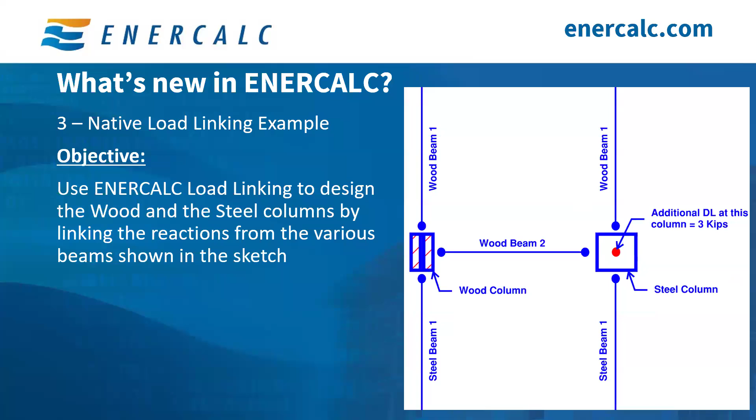Last month's session was held on May 14th, and it's titled Pole Footing Embedded in Soil. That was the module that we discussed last time. But if you jump to minute 13:35, you will be able to find this example, and we go through great detail step by step of how to use ENERCALC's native load linking feature to do all of this work seamlessly.

Overall, load linking is a powerful tool that allows the engineers to create a well-connected chain of calculations while minimizing the risk of transcription errors.

If you'd like more information about load linking, and if the video or the example that we did last month wasn't enough, please check out the load linking playlist that we have here on YouTube. This playlist will walk you through how to use load linking, again, step by step, but it will go through so much more detail, because the example discusses how to link a beam to a column and all of that.

But what the playlist does, it actually goes through every option that's available at the user's disposal to figure out how to use load linking and how to implement that into the various scenarios that engineers face every day. So you should start leveraging this powerful tool as soon as you can.

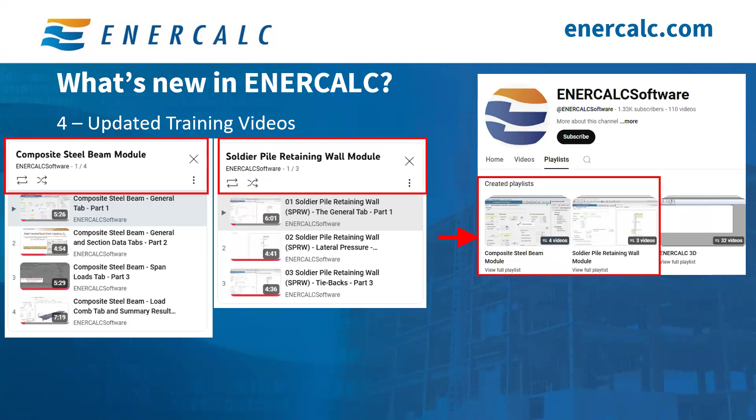Another update we have here, and this is starting in March of this year, the IBC 2024 is supported as a governing code option within ENERCALC. We will continue supporting previous IBC codes all the way to 2015. And this hopefully gives our users as much flexibility as possible to be in compliance with their local jurisdictions. As we know, many jurisdictions haven't caught up to the newer editions of the IBC.

So to update your project to use IBC 2024, all you have to do is go to General, then go to Building Code Information, and then from the Project Manager, select IBC 2024, and you can click Save and Close. Or instead of going about it the roundabout way, you can just look at the very top ribbon that you have in ENERCALC, click on this button right here that says Building Code and Load Combinations.

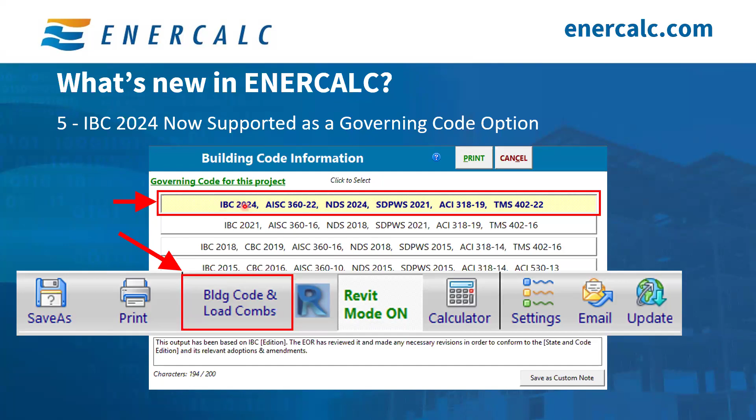Once you click on that, that will bring you to this project manager page right here, and you can just click IBC 2024 or whatever you want, and then you click Save and Close. Now, if you want to change ENERCALC to use IBC 2024, or honestly any IBC, to be used for all of your future projects as a default code, so that's the starting code that it uses unless otherwise manually changed.

If that's what you want to do, then all you have to do is go to the top left corner of ENERCALC, click on Settings, and from the drop-down menu, click on Default Governing Code and ASCE 7 Edition. Once you click on this, a pop-up window will appear, and this will allow you to do two things: choose the IBC that you want to use for all of your new projects, and that pretty much becomes your default selection.

So we choose IBC 2024, and then you have the ability to choose a default ASCE 7 edition, 7-10, 7-16 or 7-22 or whatever you would like. So once you make the selection that you want to use for all of your future projects, then you click on Select, and that will save and close, and all of your future projects moving forward will use those default values.

Another item I want to highlight is ENERCALC for Revit. ENERCALC for Revit is a Revit plugin that allows you to design structural members fully within Revit without having to export information to another calculation software. It is a simple point-and-click workflow that allows you to design a member in a fraction of the time that it would take you to do this process otherwise.

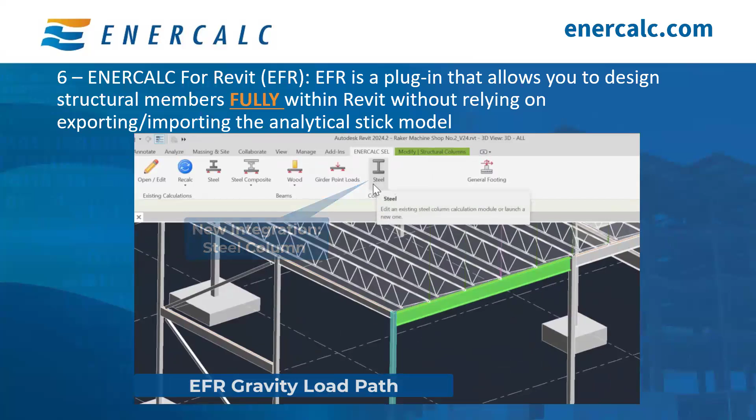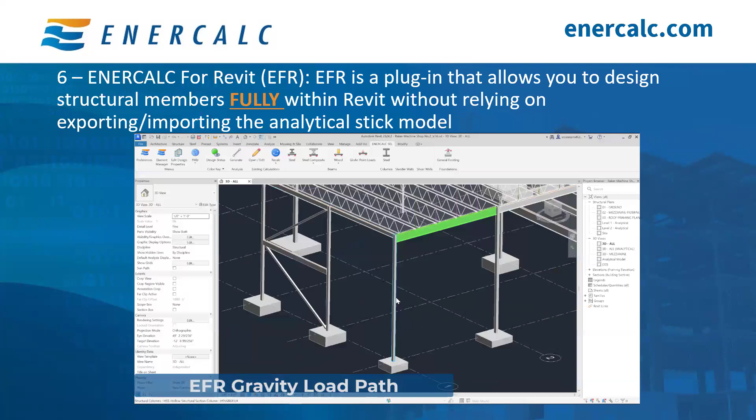Because all you have to do is just click on the member from within Revit, and it will automatically grab a lot of the information that you otherwise would have to input manually. Information such as the tributary width, the length of the member, the actual size, if you have any loads assigned to it. For columns, for example, you can assign a K factor for it. You can assign the end fixity conditions. It will know how to grab the load from a beam and link it directly into your column.

So it does plenty of the work that typically is done manually, and it takes all of that guesswork out of it. And of course, there are guided prompts that you can walk through and pick the different values that you need.

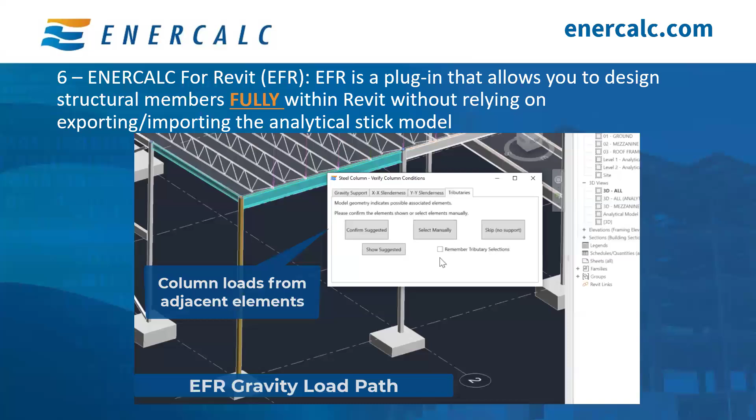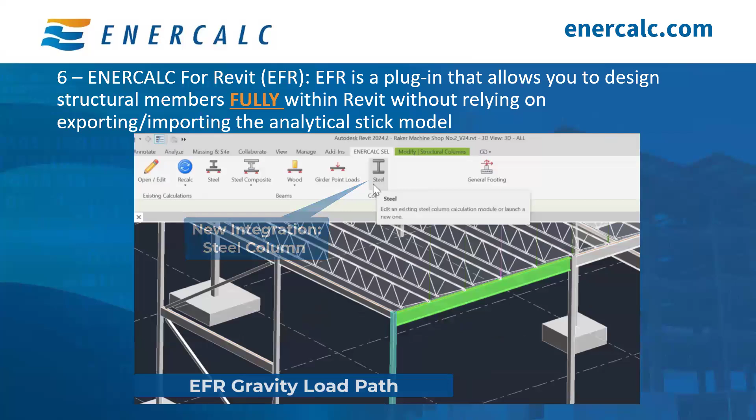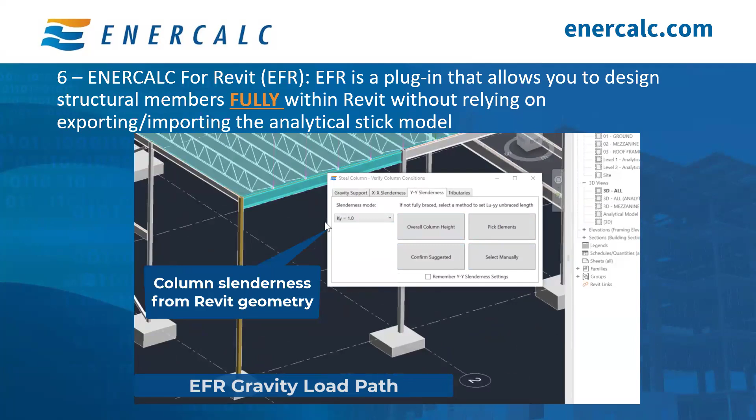So again, the process is quite simple, straightforward, and it's really that easy. So currently, EFR supports the design of steel beams and steel composite beams, wood beams, steel columns, and of course foundations. So all of our users have a full gravity load path that they can use for their projects. And of course, much more development is already underway.

So while on the topic of ENERCALC for Revit, it's worth noting that Autodesk already released Revit 2026 back in April. And I want to make sure that everybody understands that we here at ENERCALC do our best to stay active and up to date with the Revit editions. We know our users rely on our software for their daily engineering calculations, so ENERCALC is never the bottleneck of their production. Hence, we issue these monthly updates, but more importantly, from the ENERCALC for Revit perspective, we are compatible with the latest and greatest version of Revit, which is Revit 2026.

Another update is the ability to export tabular detailed results from ENERCALC to a CSV file. This is very useful to many engineers, especially the engineers who'd like to post-process some of the results outside of ENERCALC, maybe in their own spreadsheet or their own in-house tool. So all you need to do is go to the results that you are interested in. For example, we want the detailed results, ASD shear moments, and all of these intermediate values.

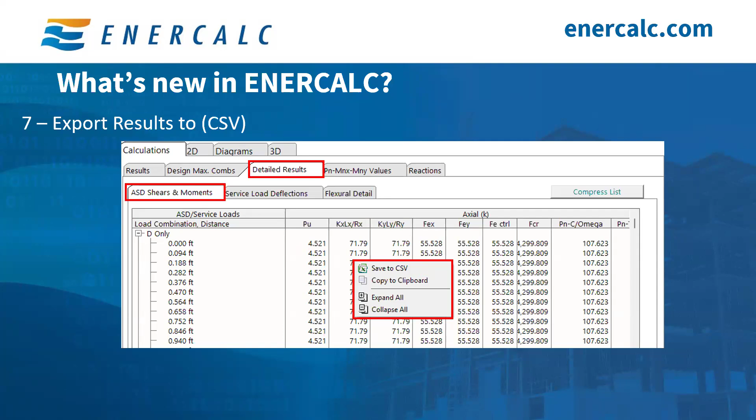And by popular demand, we made an important update this month to the general footing module. Our users now have the option to specify top reinforcement in the footing for those cases where the footing experiences tension at the top rather than the typical case of tension being at the bottom of the footing. So you can specify the rebar size and quantity for the top layer, and you can do it separately for each direction. So now our users can specify the bottom layer in both directions, the Z and the X, and then the same thing for the top layer, controlling the X direction separately from the Z direction for maximum flexibility and maximum control.

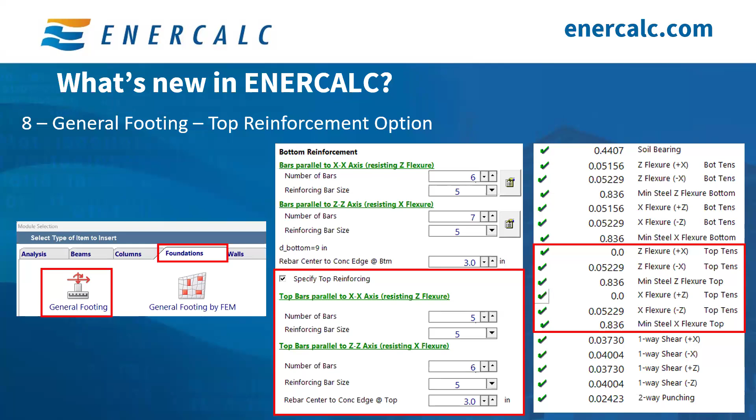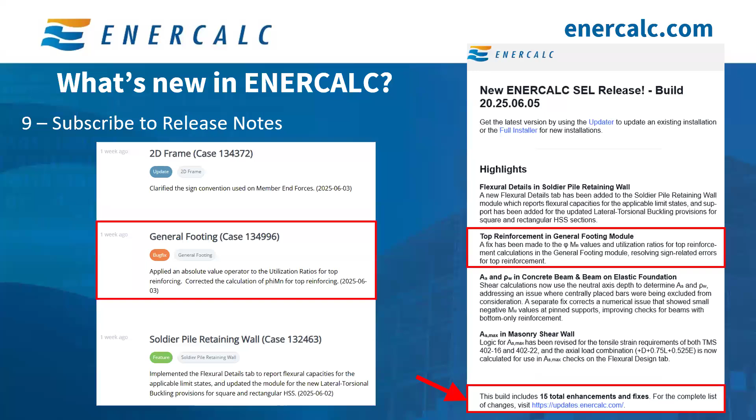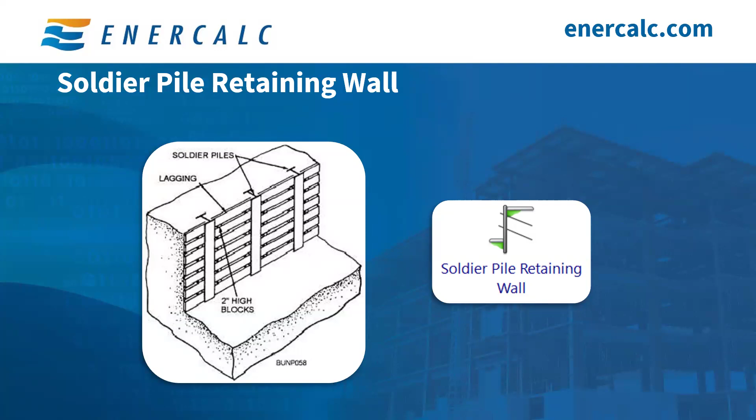Moving on, the focus of our session today is the design of the soldier pile retaining wall module using ENERCALC. There's a quick overview here of the capabilities and features of the soldier pile retaining wall module. You can perform analysis and design to check the embedment, strength and deflection of steel piles using various AISC sections. It allows the design with or without tiebacks. You can have up to 3 tiebacks.

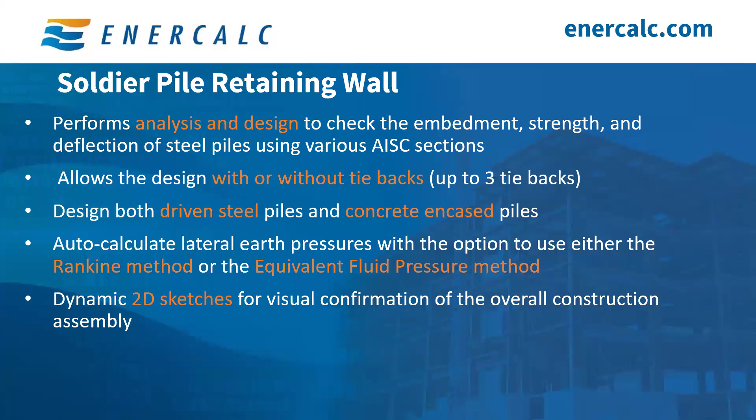And then design both driven steel piles and concrete encased steel piles. It also calculates lateral earth pressures with the option to use either the Rankine method or the equivalent fluid pressure method. And lastly, dynamic 2D sketches for visual confirmation of the overall construction assembly.

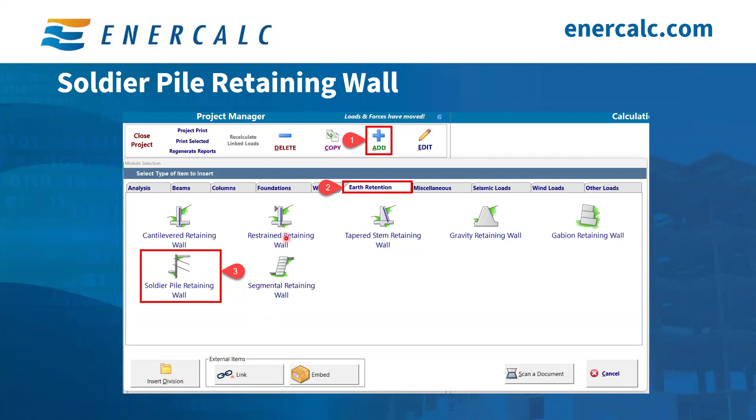So to start the soldier pile retaining wall module calculation, we'll follow the same familiar process to start any module. You click on the Add button, and then from the various categories here, we click on the Earth Retention tab, and then you click on the soldier pile retaining wall module.

Once you do that, we start in the same similar fashion that we use in all of our modules. We work our way through the tabs from left to right, and we start at the General tab. So we'll give this calculation a name. That's the first thing you should always do. In this case, SPRW1, that's soldier pile retaining wall, but it's a mouthful to say, so most likely I'll be saying SPRW for the rest of the presentation.

So that is just a name, and then you pick your steel design methodology, and in this case we're using ASD. I'm a big fan of ASD design, but you can do LRFD if that's what you like. And then we have the pile section that we want to use. I will be using a W12x30. That's what I'm starting with.

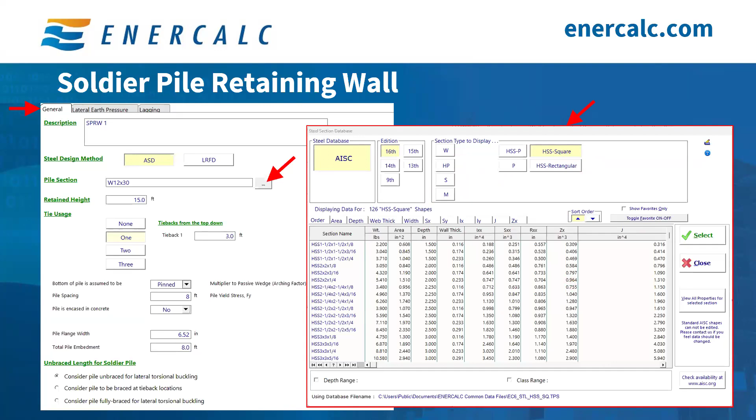However, if you click on this button right here with the three dots, that will display a window with the AISC steel database. You can choose whatever edition you want to use, and you have multiple section types. You can use a W section, HP, or an HSS section, for example. Again, I'll be using a W section for this example, which is the W12x30.

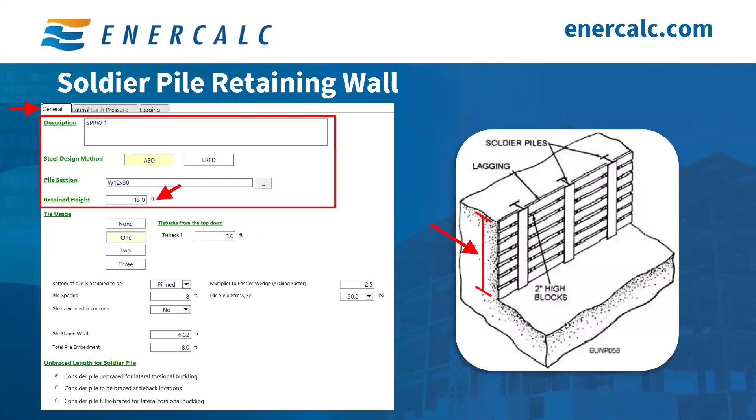For our example, we want to use a tieback. ENERCALC allows the user to have up to 3 tiebacks, and the user will have to input the location of each tieback relative to the top of the retained soil. So it's relative to this point. This is the 0 point, and everything is below it.

So this is what it would look like if we picked 3, for example. Then these will appear. Tieback 1, let's say at 3 feet from the top. Tieback 2 is at 6 feet from the top, and tieback 3 is 11 feet from the top. ENERCALC will have a 2D dynamic sketch on the right hand side, and that dynamic sketch will reflect this information.

So with that said, we can go back to our original plan, which is to use just one tieback at 3 feet from the top.

So moving on to the next section, the first portion here is whether you want the base of the pile to be assumed as pinned or fixed. For right now we're going to use pinned. And of course, this option doesn't show up unless you have a tieback here. If you don't have a tieback, then the decision has already been made. But if you have a tieback, then you have the option, without compromising stability of the structure or of the pile, to do pinned or fixed.

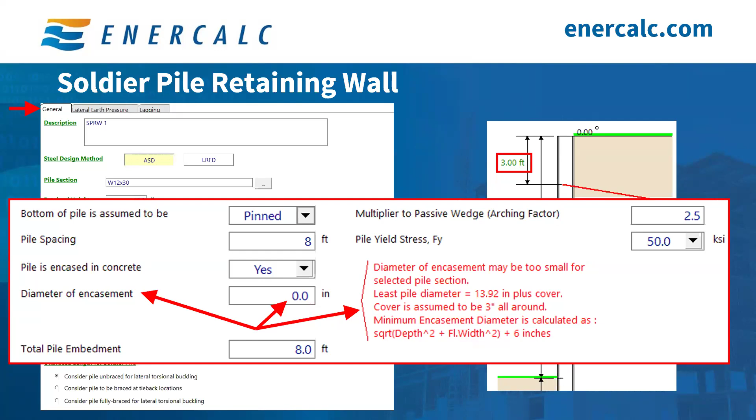And you can see right here, it tells you that this is the square root of the depth squared plus the flange width squared, plus 6 inches. This is based on a 3-inch concrete cover. That's what's assumed here. So the bottom line is that it gives you some information so you can have a good idea of how to choose that minimum diameter of encasement. In this example, we are just using the steel by itself, so no encasement in concrete.

Finally, the last piece of the puzzle here is the total pile embedment. We are saying that we're embedding this 8 feet into the soil. And that is just, again, a guess, a starting point.

The last portion we have here under the general tab is the unbraced length for the soldier pile. So the user needs to pick from one of these three options. Option number one is to consider the steel pile to be completely unbraced for lateral torsional buckling considerations. So you're saying that's completely unbraced, you have nothing that's bracing you.

Second is consider the pile to be braced at tie-back locations, which of course will reduce the unbraced length for lateral torsional buckling. And the last option we have is consider the pile to be fully braced for lateral torsional buckling. For the example, I'm going to choose the first option, saying that the whole pile is completely unbraced. Don't worry about the tieback bracing it. Just move forward with this, considering this being completely unbraced for LTB.

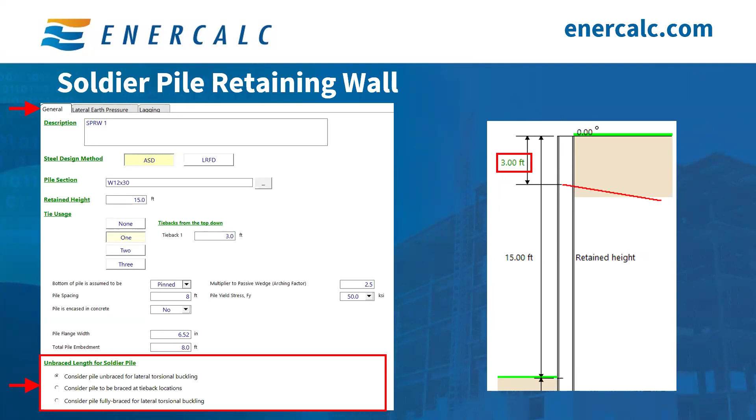Now we're finally ready to move on to the next step, which is the lateral earth pressure. If we have no tiebacks at all, then the user has the option to use either the Rankine or the equivalent fluid pressure methods. So if you click on the Rankine method, this option right here, you have to populate some information here. The first thing it asks is the phi, the soil angle, and we're going to assume it's 30 degrees. Then it asks you for the soil density. We're using 120 PCF. You could use 110. You can use whatever the geotech report provides.

And then we want to include a surcharge on top of the soil at the retained side. I'm putting 15 PSF surcharge, and I am noting that we have a backfill slope of 20 degrees. So ENERCALC then will auto calculate the passive pressure, which comes out to be 360 PCF right here. And then it allows you the option, and that's what I want to emphasize here. This calculation happens based on your angle and based on the Rankine equations, and it automatically calculates the passive pressure, and then it allows you the opportunity to use a safety factor to the passive pressure.

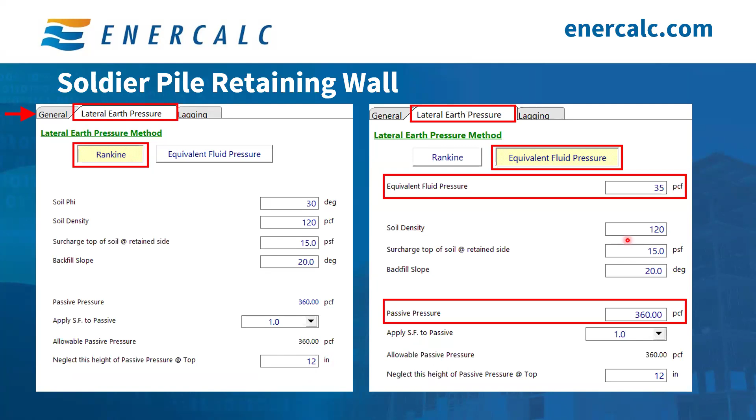Alternatively, if you didn't choose the Rankine method and you decided to use the equivalent fluid pressure method, then you don't have to put an angle anymore, but what you have to input is the equivalent fluid pressure. In this case, we're using 35 PCF. Again, the soil density is the same. The surcharge and the backfill slope are the same. But now the passive pressure is something that you have to input. It's not going to get automatically calculated. This is a user input now.

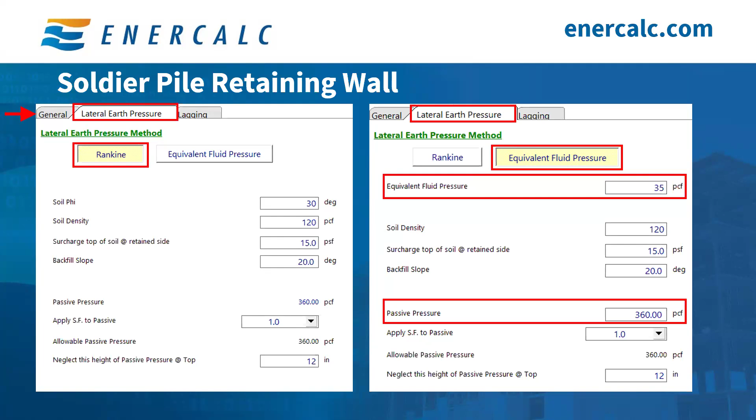And then you'll find yourself in the same boat with the safety factor. And of course, the allowable is always automatically calculated based on what the passive pressure is and what the safety factor is. And then, of course, neglect this height of passive pressure at top. That's the amount of soil you want to neglect. So this remains the same. What's important to say here is that all of this is applicable only if you are not using any tiebacks. If you're using tiebacks, then ENERCALC calculates the pressure a bit differently, because now you have a whole different profile. This is not your regular standard calculation process.

So for tiebacks, whenever you have that, this is documented here under the soil pressure reference tab on the right-hand side. This shows you how ENERCALC handles the calculations based on having just one tieback, which is this right here, or having multiple tiebacks. So going through the calculations of that and the equilibrium, this is really the formula that you end up with for the magnitude P, that's the magnitude of the pressure in the diagram.

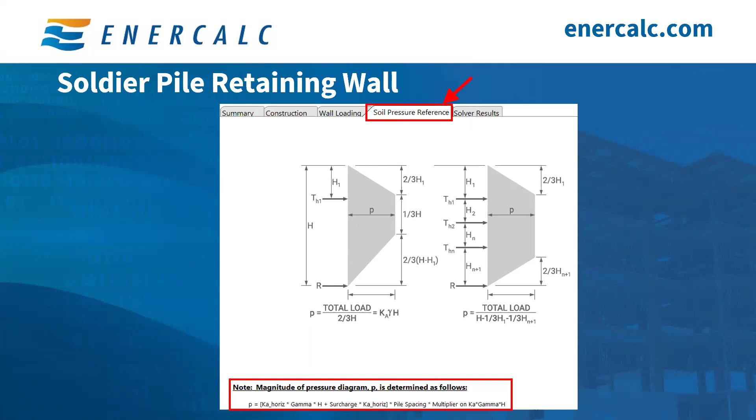So now that we have addressed all of the input information, we are ready to visually evaluate the final assembly as well as evaluating, of course, the results. If you click on the construction tab, which is right here, you will have this 2D sketch. This shows you the slope of the soil, which is shown here at 20 degrees. It shows the location of the tieback, which is at 3 feet from the top. And of course, it shows the required embedment. Right now, it shows it as 7.41.

We told it to have 8 feet worth of embedment. It shows that right here. It says extra embedment provided, which is 0.59. You can choose to further optimize the design, or you can just say, okay, this is good enough. I'm going to keep it at 8 feet.

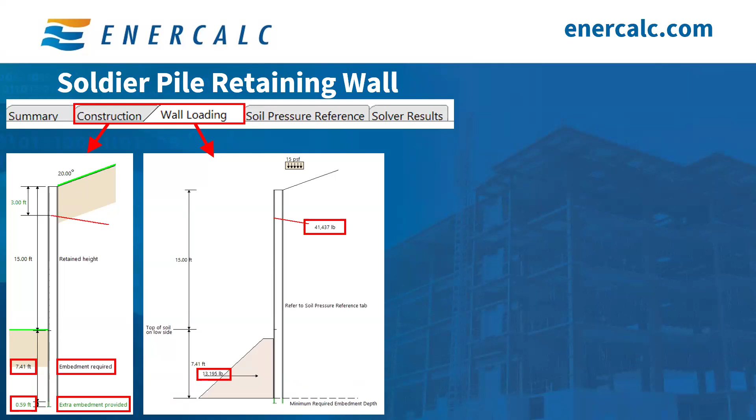And under the wall loading tab, you will have this different diagram that shows you a little bit more of the reaction here at the tieback. And in this case, the reaction is 41.4 kips. And the reaction at the base is roughly 13.2 kips at the bottom.

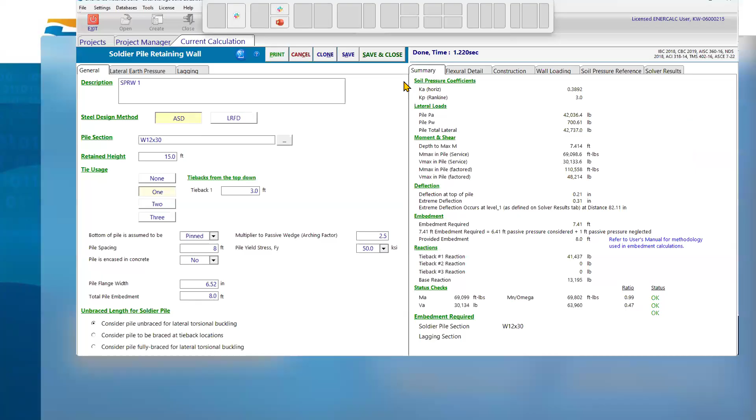I'm on it. Any plan to add Coulomb earth pressure design capabilities in addition to Rankine and EFP? So you saw as Mac went through, we had the toggle between Rankine and equivalent fluid pressure. If you have a need to do a Coulomb as opposed to a Rankine pressure, feel free to send that as a feature request to support at ENERCALC, and the engineering team will be able to discuss that with you.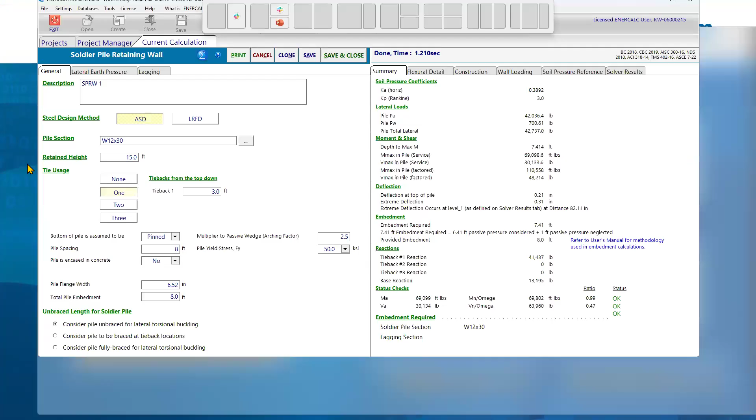Question from Brett. If a pile is encased in concrete, should we say fully braced, or how to show lower section cantilever up is braced, no tiebacks used? Mac, did you want to go back to the discussion about bracing versus not? Yes, correct. So let me do this. So if you click on none, and that's what he's looking into.

If we don't have any tiebacks at all, and this is encased in concrete, regardless of what you use here, whether it's yes or no, if the concrete is obviously going to fully brace it, then you can just say, okay, consider pile fully braced for lateral torsional buckling, and you can just do that right here, and you'll be good to go from there. If you want to say it isn't, then it isn't. So you do have the option to do that, regardless of what you choose.

The only extra option you get here is that if you do have a tieback, then you can say the tieback is an intermediate support point that can reduce my unbraced length for lateral torsional buckling. So if you don't have any tiebacks, then your only options are you're either braced or you're not, and you do have the option to pick whichever you'd like.

All right. Yeah, and I don't know if you can see my screen here very well, but this is our exact example right here. If you go with the first option that I chose, which is completely unbraced, no special treatment for the tieback or anything, just completely unbraced, that was giving us 0.99 for the stress ratio for the flexure.

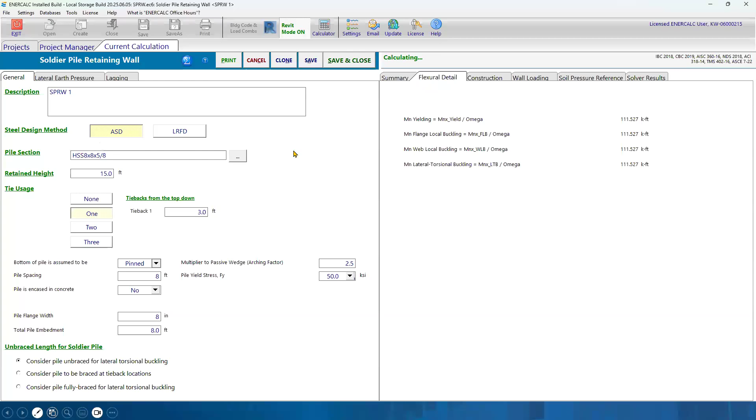So obviously the part where we do this with HSS has already been implemented, and that was implemented in this round of updates. But the W section hasn't been implemented, and that's why I didn't really mention it this time. We wanted to mention it in the presentation when it's fully done. But at least for HSS, it's definitely done. For W sections, it's under construction. It'll be happening at some point.

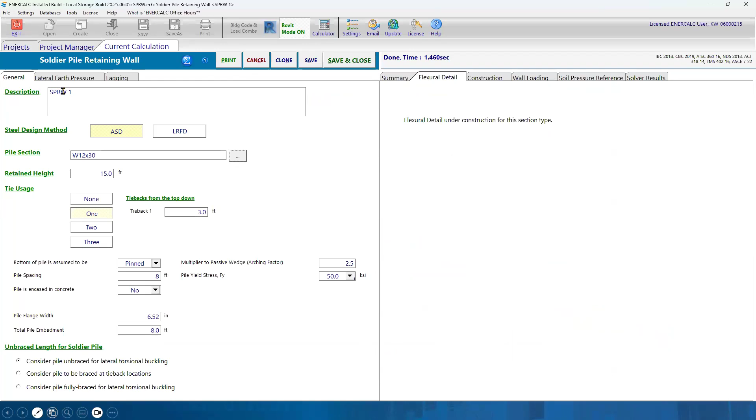All right. Next question from Brett. Is it possible to add in vertical bearing load offset behind the shoring, say building foundation 10 feet behind the shoring wall? You talked a little bit about surcharge, Mac, but it looks like he's asking for it to be more of an offset surcharge, concentrated load and offset. Yeah, that's a feature request.

We have the capability for surcharge right now. You just can't offset it to an arbitrary distance in the backfill zone. So definitely reach out to the support team if that's a feature you'd like to see integrated. And the same thing if you want it to be a particular point load. That's also another.

Question from Dan. Do you mind going over the lagging tab? There's not a lot of information there. It's mostly labeling information more so than design information. Correct. What it does is that you can choose the lagging depth. So it depends on which lagging you're looking into, the one all the way down by 5, 6 feet below the retained soil, or the one that's only 3 feet below the retained soil.

So you can kind of put lagging depth here, and this will do some calculations to tell you what kind of moment and pressure and shear, but this does not design your lagging for you. You have to go and design lagging separately outside. This is just to give you a good idea. Hey, this is the analysis, this is how much load you have. You need to go outside, design your lagging.

Maybe your lagging is 2 by 10. Then you come right here and you say 2 by 10 manually, and it will just provide it for documentation, but it does not design it. So that's why I don't like to go over this, because I want to make sure that you're not getting fooled into this designing. This is not designing. This is just telling you what's the applied load on your lagging.

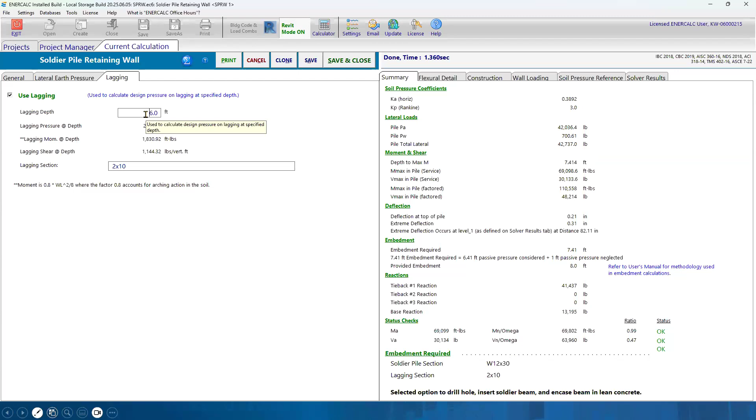If your lagging is placed 6 feet below the retained soil, then you need to take that moment and that shear and all that stuff, go design your lagging somewhere else, and then come back right here and say, okay, a 2 by 10 works or whatever, and that will be included from a documentation perspective in case somebody's reviewing your calculations.

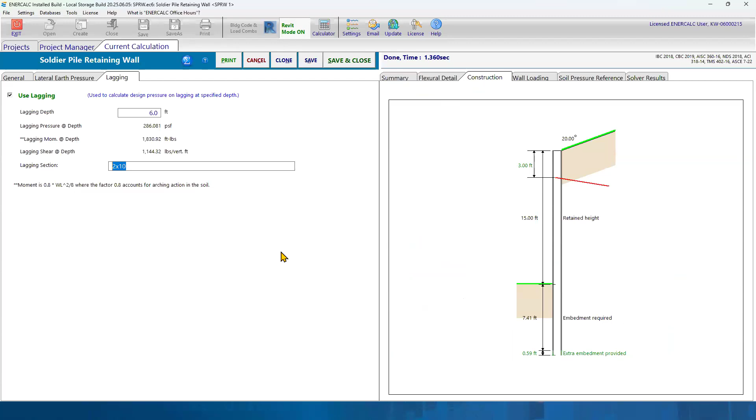All right. Next question. Is tieback angle considered in the sheet pile calculation? Again, not to beat a dead horse, but I do want to make sure everybody's clear that we are talking about soldier pile and lagging, not continuous sheet wall, since there's some subtle differences there. But the module does not have an input for the inclination of the tiebacks.

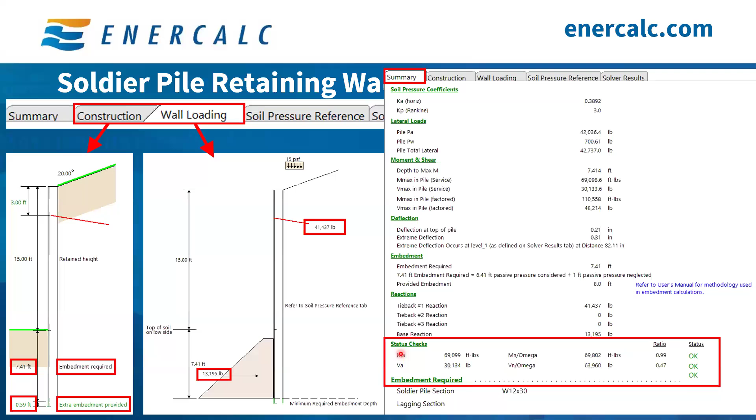It's basically modeled using a horizontal reaction point, and so if you had inclined tiebacks, you would have to take the inclination that you're going to use and use that to appropriately magnify whatever is the vector of the inclination of your tieback. Hopefully that answers the question.

Yeah, that's absolutely right. Now, when I get back to this, this is what we're designing. So those are not sheet piles. We're designing just certain pieces at 6 feet, 8 feet on center, and then you're doing lagging in between. So this is not sheet piles.

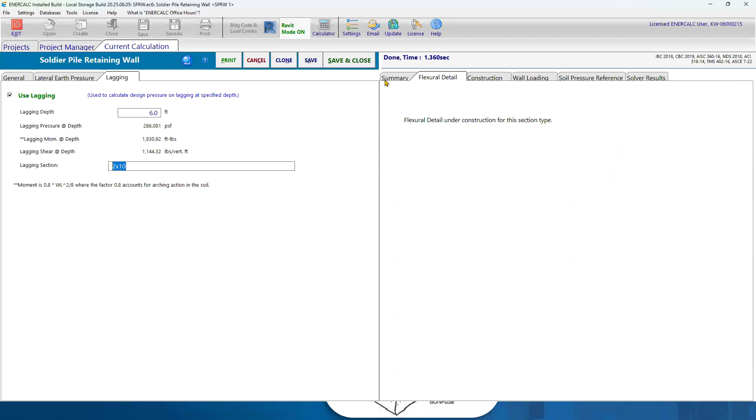All right. Next question. I'm following the example with the software that we have. The tab for construction sketch and wall loading sketch are the same sketch. Both tabs show construction. So there's a minor display bug that the team is working on with displaying the wall loading sketch in some cases. So that's a known issue, and there will be a fix upcoming for that. So good question on that.

Next question. I can't toggle between Rankine and equivalent fluid pressure. So that's probably because you have tiebacks activated. Once you activate the tiebacks, like Mac was saying, that throws you into a completely different analysis approach. So instead of using the continuity of the soldier beam into the soil, activating additional pressures below the excavation grade, we're now using those tiebacks to create stability for the wall. So it's a completely different analysis.

Mac, go ahead if you want to elaborate. That's absolutely correct. So if you choose any tieback, then those are no longer what we use. And this right here that says soil pressure reference, this is what gets used. So if you have a single tieback, this is TH1, for example, the tieback location at height 1, that's what gets used. If you have multiple tiebacks, then the equation boils down to this, which is TH1, TH2,

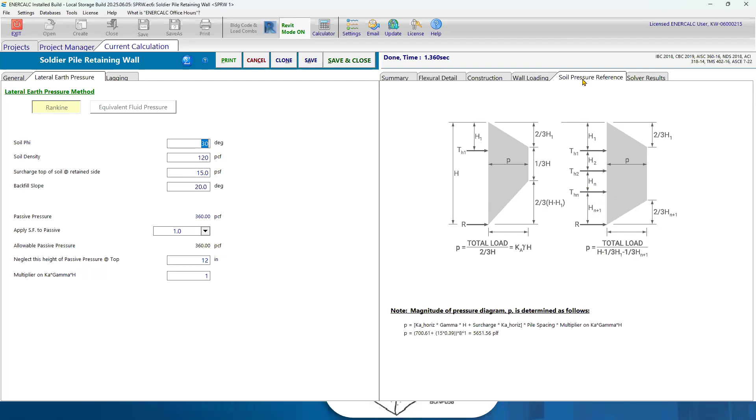TH3, and each one has their own height, and it's all done for n, so it doesn't matter how many you have. So that's more of the generalized equation. So if you have a tieback, this is not getting used, and what's being used is the soil pressure reference right here. Now, if you go back to clicking none, so no tiebacks whatsoever, then you can come back right here. You can toggle back and forth and input whatever information you need.

All right. Next question is kind of related to some of our questions about tiebacks. Can you add the design of the tieback? And so that would fall more in the feature request realm right now. If that's something that you guys have need for, go ahead and send that to the support team, and that'll kind of go on the pile of feature requests so that the engineering team can direct those development priorities.

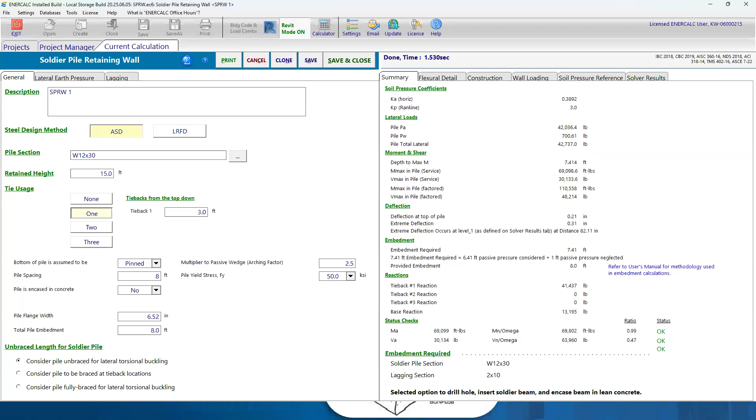Another interesting question: how are you planning to implement AI into ENERCALC? For those of you who don't know, you already have some AI capabilities for getting help and support. We've talked about that once or twice in previous customer sessions. The ENERCALC engineering team is growing and larger than it's ever been, but on your nights and weekends and holidays where you need support fast and you can't get a human response, you can go to enercalc.com or enercalc.ai. You can navigate directly and get our chatbot, which is like a GPT style AI trained on our ENERCALC documentation.

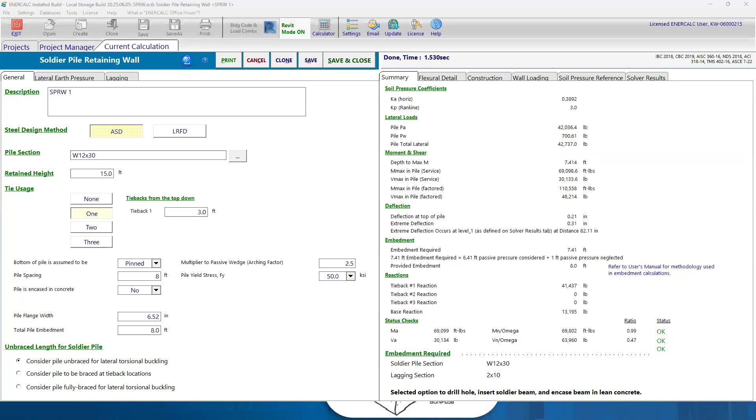Ask wayfinding questions like, hey, where do I find updates and installers? And technical questions like, how does the module do such and such technical tasks? So you have all those capabilities. That's a support oriented thing. As far as engineering design oriented capabilities, we're interested in hearing from our customers. If you guys have a use case where you say, hey, what if we could use machine learning or AI or data analysis to do fill in the blank, definitely reach out to us with those questions or comments.

Like, does ENERCALC implement IBC 2024, something like that. So you can have some questions like this, and then if it knows what you're talking about, then it'll say yes. If it doesn't, then it'll tell you go talk to support. This is definitely not a replacement for support or anything, but it might take you to the right place or to the right FAQ or to the right user manual entry that we have that can help you navigate or answer some of your questions.